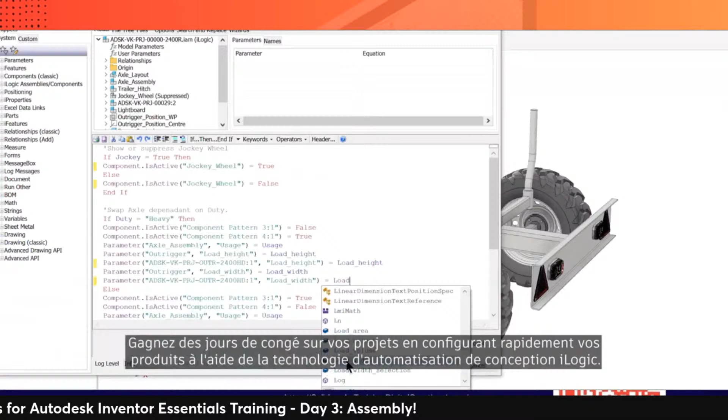Inventor provides you with a stable and responsive environment to help you get your projects to production faster, with a complete set of tools for sheet metal, welded frames, tube and pipe, and electromechanical, and direct access to a robust content library and engineering calculators. Shave days off your projects by rapidly configuring products using iLogic design automation technology.

Speed up design reviews with a cloud-based tool that protects your intellectual property. Connect directly with AutoCAD for your project workflows. And you can extend the power of Inventor with a subscription to the Product Design and Manufacturing Collection to take your designs further with 2D and 3D workflows, cloud-based design and manufacturing, factory planning, and high-end visualization.

Regardless of what you make, industrial machines, conveyor systems, or top fuel dragsters, solve your most interesting problems efficiently and effectively with Autodesk Inventor.

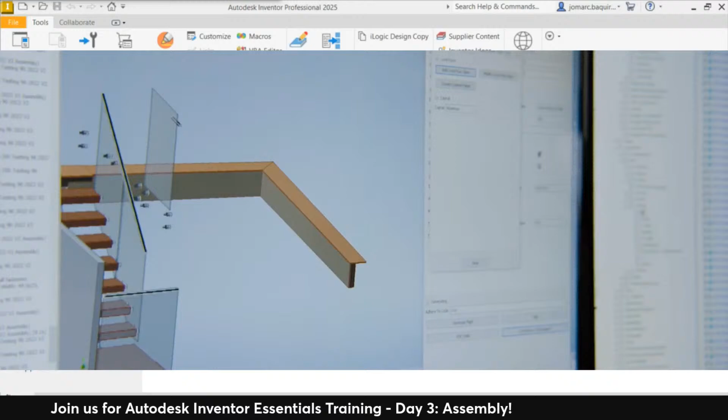So let's say we decided to pull a foot off of that floor, we added a wall there. I would come in and modify the environment, tell it for length, put in either an absolute, or in this case, if they said we'd subtracted 10 inches, I'd do it. And I would just tell it to update all my glass. It's going to automatically engineer it for me. It's going to make it so that it meets all building codes that our product is certified for, and it's going to generate shop drawings and production prints for these as it goes. It's that easy. We're manufacturing 10 systems, 20 systems a day right now.

With Inventor CAM, we take the exact model that is part of our automation that we've used to design for the customer, and it's already toolpathed. So that production engineer is just posting that right to the machine. It's a huge time savings, and it's a quality assurance. As we build in more and more automation, we continue to drive down potential errors that a user can make.

Welcome to Vero. Thank you. Have a seat.

We leverage the Forge Viewer. It enables the customer to view on a web page on their phone exactly what we're engineering and how it will fit into their space.

This looks amazing. We are now over 10 times the size that we were when we started all of the automation. Then in the next 5 years, we're going to grow from $100 million a year in revenue to $500 million. Automation is critical for scaling at the rate that we're going. We would not be able to do the things that we are doing today and looking into the future without the Autodesk tools.

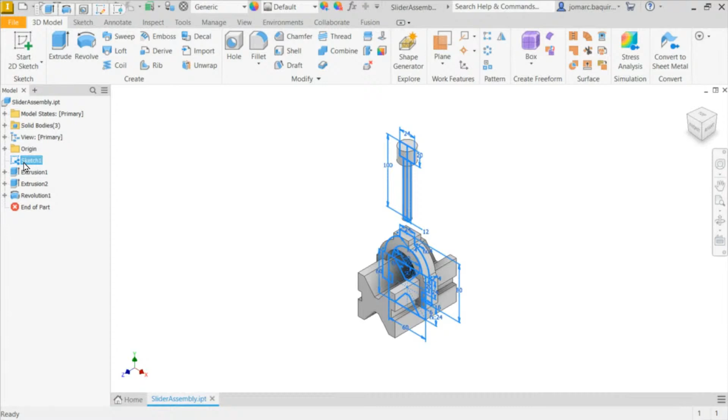Recall on our last session, I instructed you to create this part. So again, this part, this is actually not a part, not assembly. Technically not an assembly, technically it's a part. A part that has 3 solid bodies, and it all came from a single sketch.

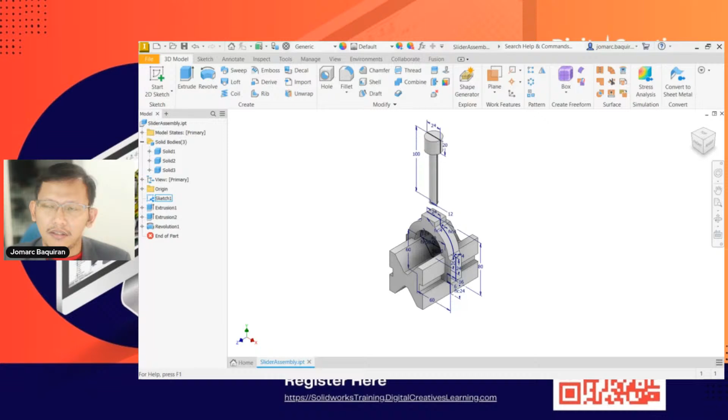So again, guys, requesting you to screen capture this activity and hoping you have completed the course that we shared about mastering part modeling.

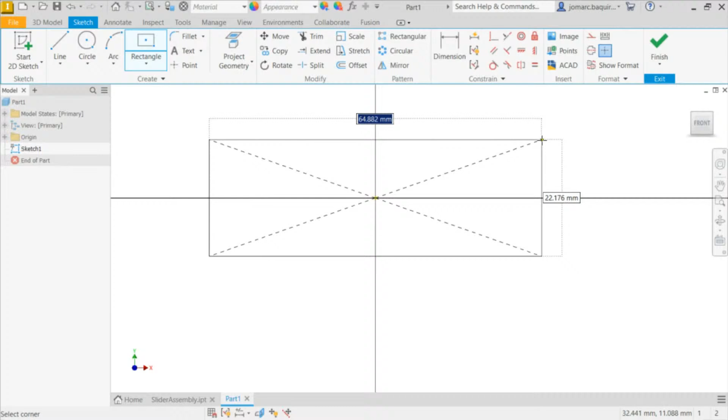Selecting XY, and because it's a rectangle, head over to rectangle, specifically 2-point center rectangle. As always, the target is having our coordinates at 0 be at the geometric center. So for the geometric center of this rectangle, it should look like this.

We haven't applied any constraints yet, that's why I can left click and hold and resize this entity, or this rectangle.

Next, let's add dimensions. The shortcut for dimension is letter D. Let's define this, selecting this horizontal line, value is 120. This vertical to be 40.

Okay, I want you to follow along. Quickly create this rectangle having a length and width of 120 and 40.

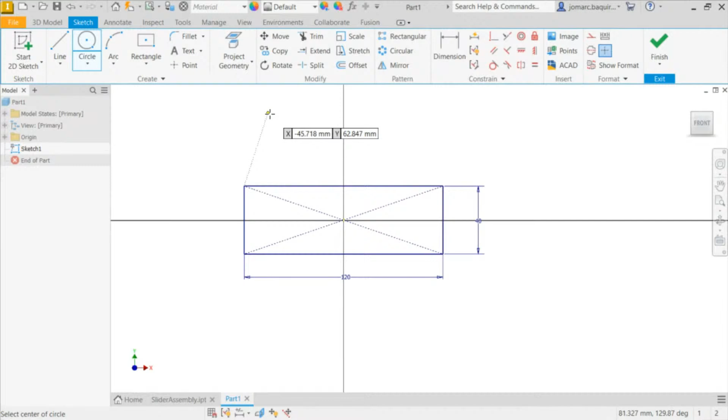Okay, and next, there's two holes or circles. Instead of creating it here, I prefer creating the circle somewhere around here. I can bring this over, but I prefer doing things on a clean slate.

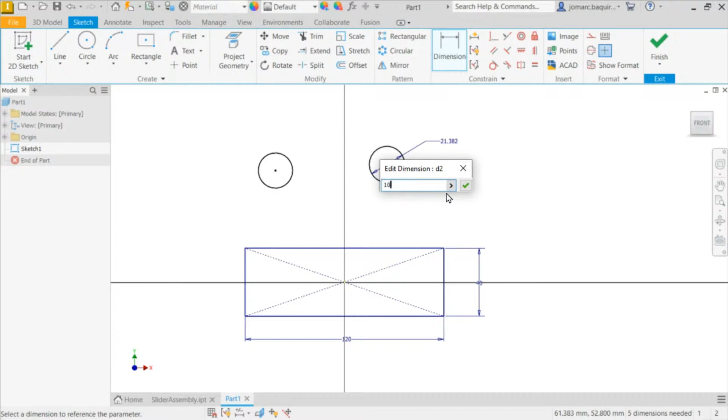So two circles, hitting D, diameter of these two holes or circles to be 10. Keying in 10, hitting enter. And obviously these two circles should have the same diameter.

With that in mind, we're going to head up to constraints and simply apply an equal constraint. Selecting equal, I want this circle with the dimension to be the same as this circle which has a dimension. So notice the equal constraint symbol visible on these two circles.

Moving this, I cannot resize this anymore because it is equal to the circle on the right side. Okay, I want you to follow along, let's create this one, very simple.

Next, the distance between, or the pitch of these two holes, is actually 80. For me, I prefer creating a line from this center point going to this center point. Let me zoom in.

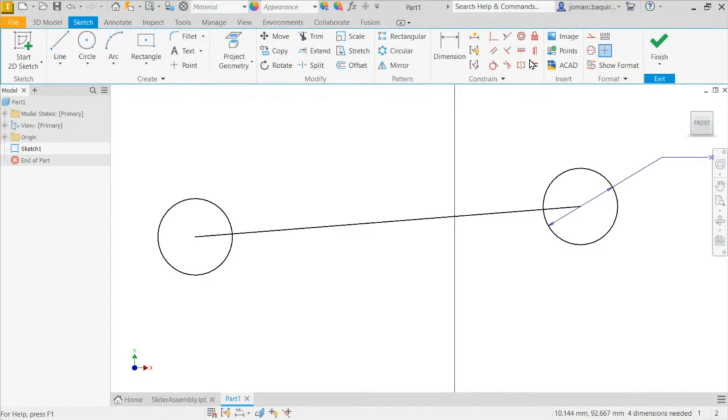So I connected these two circles with a line, and now the horizontal constraint was applied. If it's not, like for this instance, I have deleted that constraint again, I'm going to head up, selecting horizontal, and selecting this line to be perfectly horizontal.

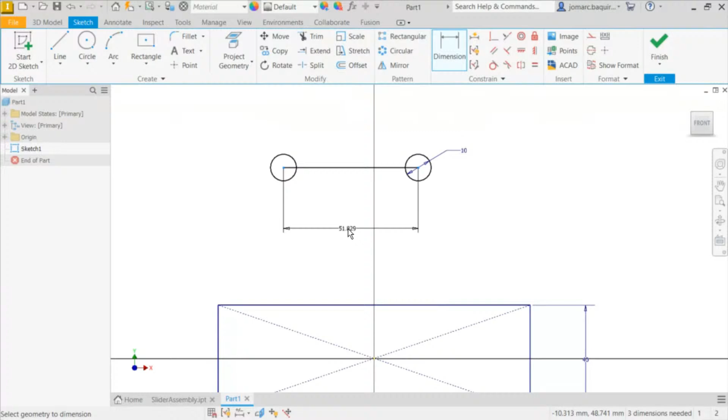Next, I'm going to add that dimension. Instead of selecting this line, the dimension is actually indicating that the 80 is the distance of this center point and this center point. Yes, it may be the same, but I'm suggesting to you to dimension things in their exact design intent, because what really is being defined by 80 is these two center points. So keying in 80.

Next, notice here on our rectangle it created construction lines, these two diagonal lines. I'm going to convert this horizontal line as well into a construction line. With this line selected, left click, I'm going to right click and select construction. Or on our ribbon, you can select center line from the format. Again, right click, selecting construction.

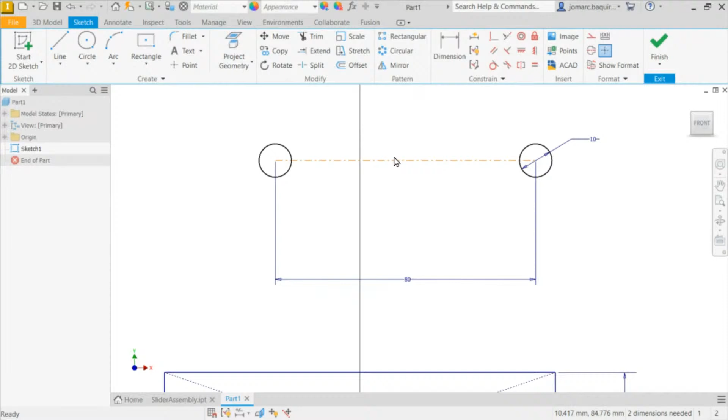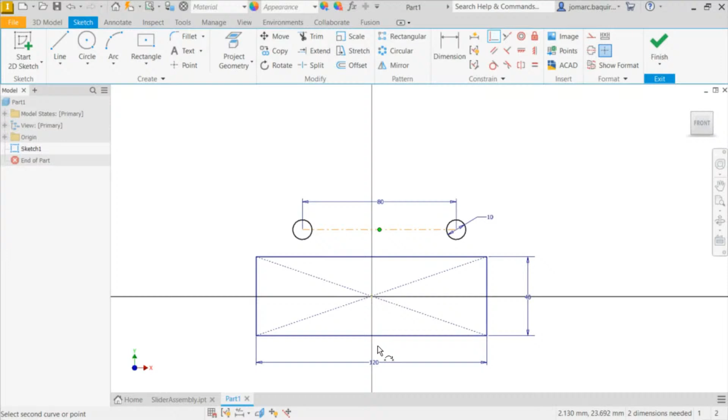Next, I want this to be perfectly at the center, into our geometric center. To do that, I'm going to select our coincident constraint up above. Searching for the midpoint, hovering over here, notice that green dot, it indicates it's the midpoint. Selecting this midpoint and selecting our origin. This red dot, if you go to our model tree, is actually this center point. So selecting that center point.

I'm trying to move these entities just to check, and obviously it changed into a dark blue color, which means it's fully defined or fully constrained. So from that, we're now allowed to do extrusion.

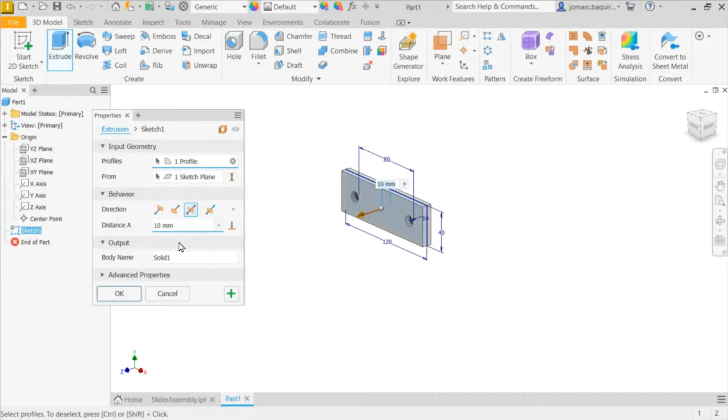Selecting finish, selecting extrude, and selecting this profile. Again, the goal is always to have the XYZ 0,0,0 at the middle or center. So for the behavior, I'm going to change this into symmetric, and again for the thickness, it's 15. Hit OK. Let me select this edge.

If you really want to check, I hit M to select Measure, selecting this edge. It really is 15, just to confirm. 15.

So we're done with this part, but to be organized, let's rename this with Control S. I'm going to paste to the project folder, the location where I'm working. Hitting enter, this is named as plate. So naming this as plate, hitting enter.

So again, showing you our activity this afternoon. For those who are late comers, you may screen capture this. We're currently done creating the plate.

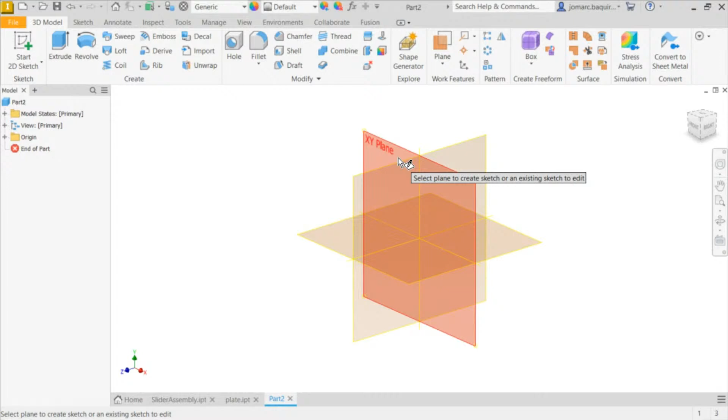So again, we're prompted to select the plane to sketch on. I prefer the XY plane. I am in the line command. Notice here, a line is being activated.

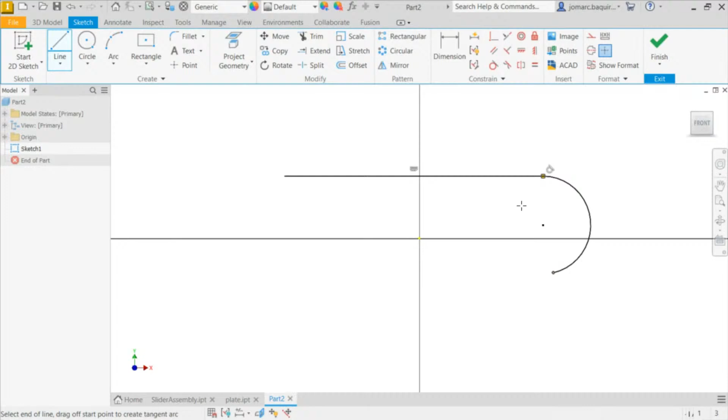As an exercise, I want you to left click, then left click once more but still holding the left mouse button. So left click and hold, release, left click and hold. That means if you hold the left mouse button, you create an arc. So release, left click and hold, connect it to the other, and release. Giving you a few seconds, I want you to be familiarized with holding that left mouse button in order to create a simple slot.

Left click and hold, release, left click and hold, release. So left click and hold to quickly create an arc. Going back, I have created the cross link.

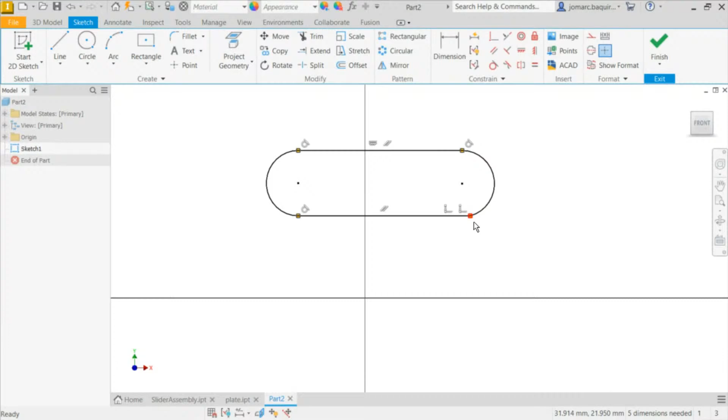Let's now put dimensions. I'm going to hit F8 to reveal the constraints that currently exist. Notice here on the lower right, we need a tangent to make this a smooth transition. Selecting tangent, selecting this arc and this line.

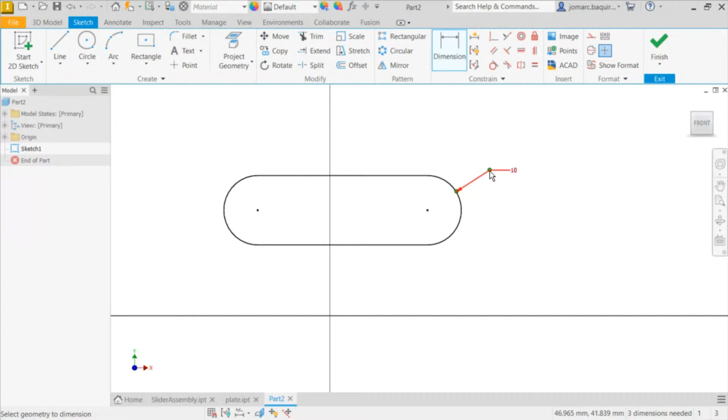Resizing this again, hitting D. The radius for this arc to be 10. And it has two circles.

Control Shift C, the shortcut for a circle. So creating two circles, or another one just for demonstration purpose. I'm going to create the circle here. Next, defining the diameter of the circles, so it's 10. And selecting the equal constraint to have this circle and this circle equal in diameter.

Instead of using the coincident constraint to have these center points aligned with each other, I prefer showing you concentric. Concentric causes two arcs or circles to have the same center point. It's actually the same as coincident, but only for arcs, circles, and ellipses.

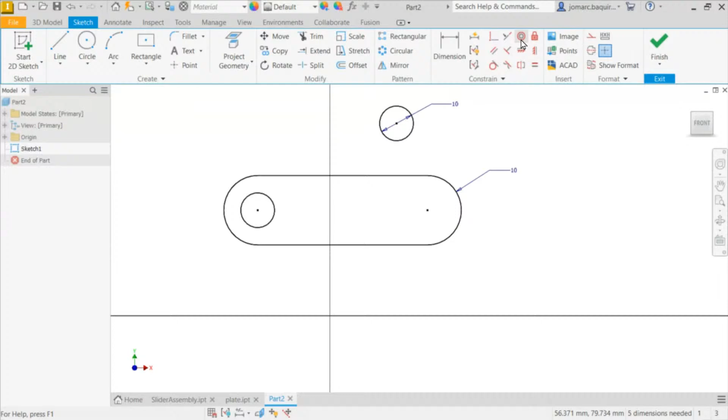So selecting this circle and this arc. Let's define the distance or dimension there, which is 80. D. Selecting these two center points, 80.

Okay, and next, of course, I want our geometry with respect to having our XYZ, or the center point, be at the center. So let's now position this accurately.

Instead of creating a diagonal line and then turning it into a construction line, let's utilize our constraints. I'm going to select our vertical constraint, looking for that midpoint. It's here. Selecting that midpoint and going over to our model tree on the left, selecting the center point. Notice it nudged to the left, which means the midpoint and the center point are now aligned vertically.

Next, applying the same procedure but now horizontal, selecting this center point and our center point. Moving this dimension, placing that over here.

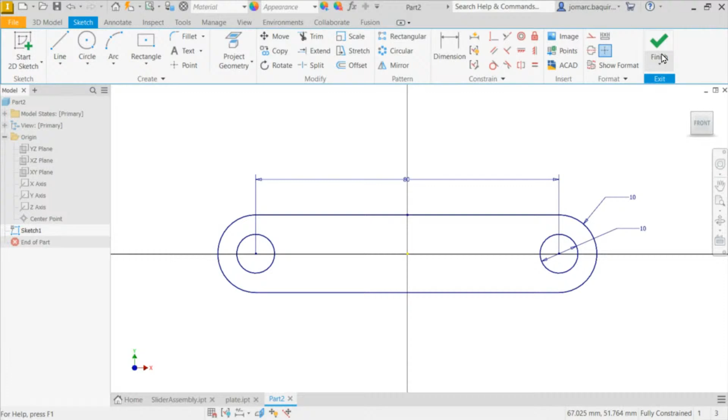So we now have a fully defined sketch, and if this is all in dark blue, we can now hit Finish Sketch, or simply select E for Extrude. So prompted to select profiles, it's a single profile. The behavior to be symmetric, thickness to be 10, and I'm going to select OK.

And double click the mouse wheel for zoom extents. So we're done with the cross link, hitting Control S, naming this as cross link, hitting enter or save.

Okay, so yep. Giving you a few seconds to create that cross-link. And showing you again our activity for today.

So next, hit Control N. Let's now create the link L and link R. Hit Control N or up to the right for new part. Again, it's metric standard millimeter.ipt. I'm going to hit Control S to quickly save this file, naming it simply link.

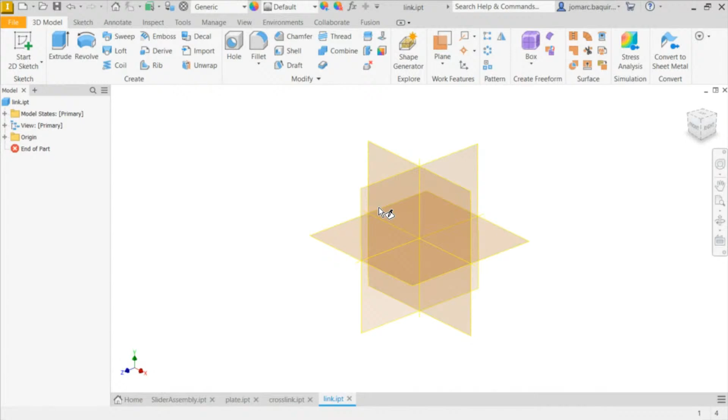So hitting S for sketch, let's sketch on the XY plane. Hit L for line, and let's recreate that technique utilizing an arc while in the line command. Left click here, left click and hold, release, left click and hold, going to this endpoint and release.

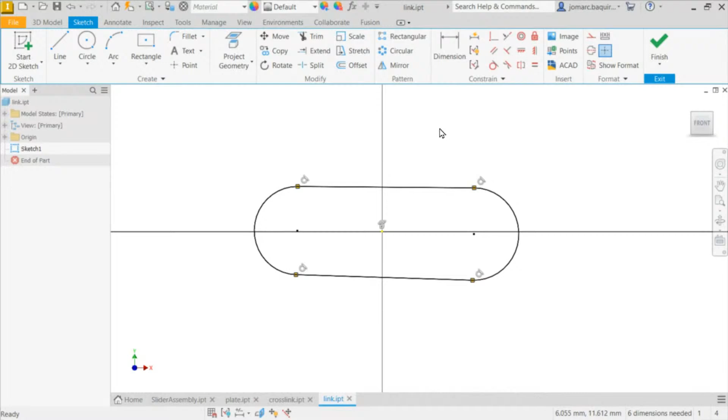F8. Notice I have two concentric constraints, selecting tangent, selecting this line and this arc, this line and this arc. Next, this obviously needs to be horizontal, so selecting horizontal constraint.

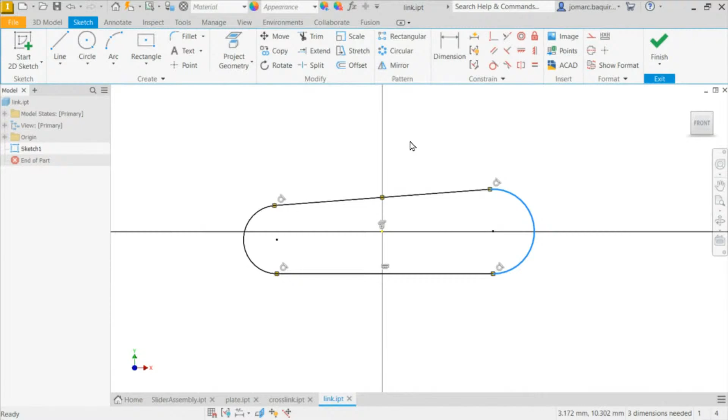Let's apply the same technique: selecting vertical, searching for the midpoint of this line, aligning it with our center point, selecting horizontal, selecting the center point of that arc and the center point. Let's check. By moving entities, you can find out what needs to be applied. So this one obviously needs to be horizontal.

Okay, so next, Control-Shift-C for a circle, creating a circle from that arc's center point. Diameter for this is 10 as well. So creating two circles, keying in 10, making these two circles equal.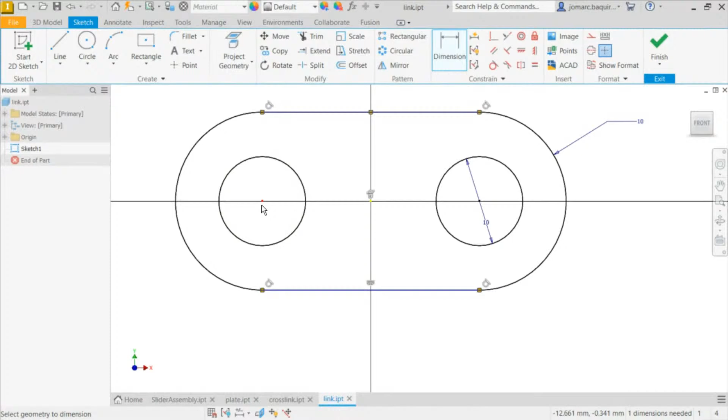Hit D again, defining the radius of this arc to be 10. Hit D again for dimension, selecting the center point and the center point. Distance between them to be 30. All in dark blue. So we can now hit E for extrude.

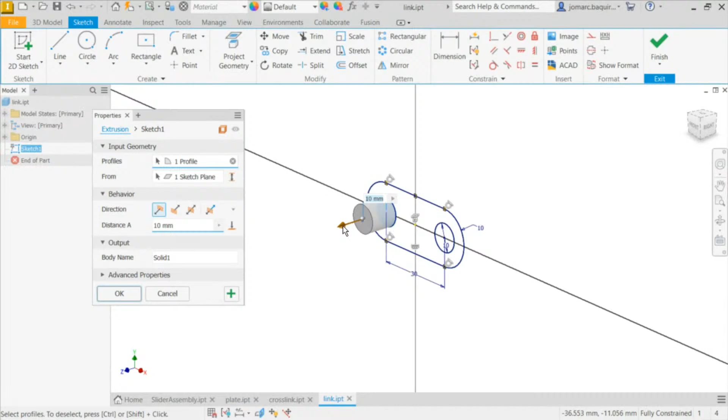For now, I prefer selecting this profile on the left, selecting that arrow, moving it to the right. As you can see, it's actually 15. But of course, I'm coming all the way from the center and this plate's thickness is to be 5. So if that is 15, there's still an additional plus 2.5, right? Because I'm coming all the way from the center.

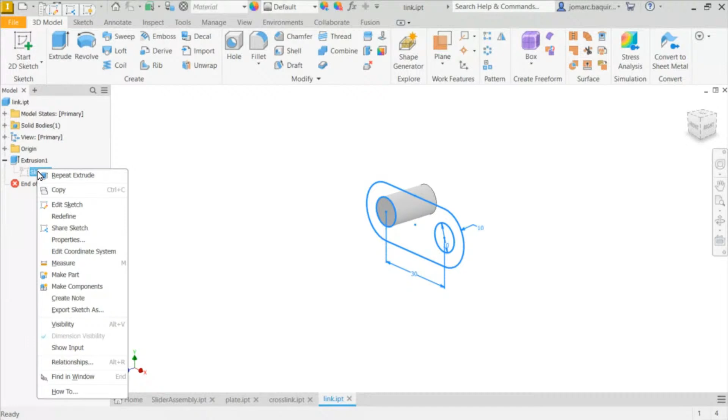And we haven't created that plate yet. So 15 plus 2.5 - I'm showing you we can create a mathematical operation inside the dialog box. So hitting enter. Of course, the sketch was consumed by extrusion 1, so all we have to do is twirl this down or expand this.

Select that sketch, right click and enable its visibility. Alt V. Okay, so hit E again for extrude. Selecting this profile, pulling this arrow to the left. So directly keying in 12.5. Hit enter.

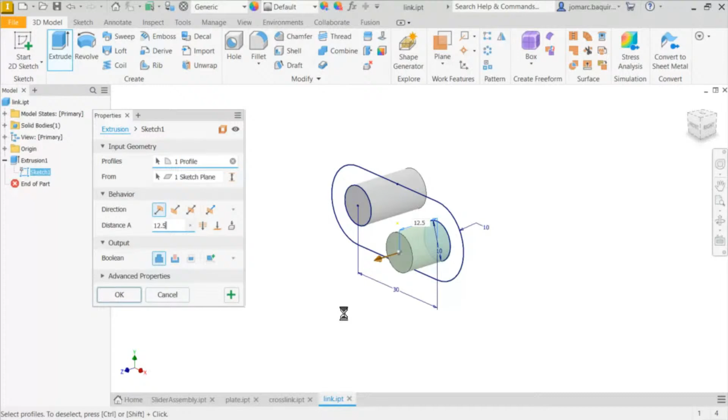Finally, hit E for extrude again, selecting symmetric, and once more the thickness for this to be 5. But notice we have a whole recess here.

So with that, I have selected one profile. I'm holding Control to add that profile. So rotating as well, holding Control, selecting this profile as well. So I have selected 3 profiles.

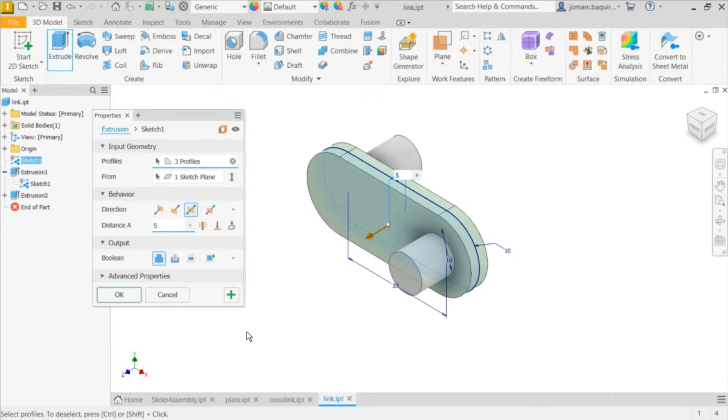Okay, and of course, turning off the visibility of sketch 1. So right click, turning off its visibility. Control S to save this file.

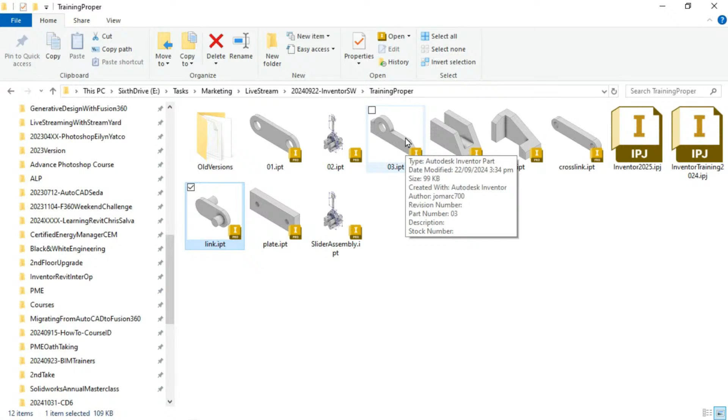Okay, so again, I'm showing you my project folder. So we have created the link, the plate, cross-link, and link - these 3 are all complete. So the next thing we're going to create, of course, again, recall all of this 3 has a file name extension of .ipt.

And for assembly, the file name extension for that - I'm going to hit Control N. As you can see here, the file name extension for an assembly in Inventor is .iam. So let's select standard millimeter .iam. Double left click.

Okay, so from here, we now have it currently named as assembly 1, if you can see the tab at the bottom. So we're going to bring in, of course, the parent component - that parent component or parent part is actually the plate. So let me show you one of the methods in bringing in components or parts into an assembly. I have here my project folder.

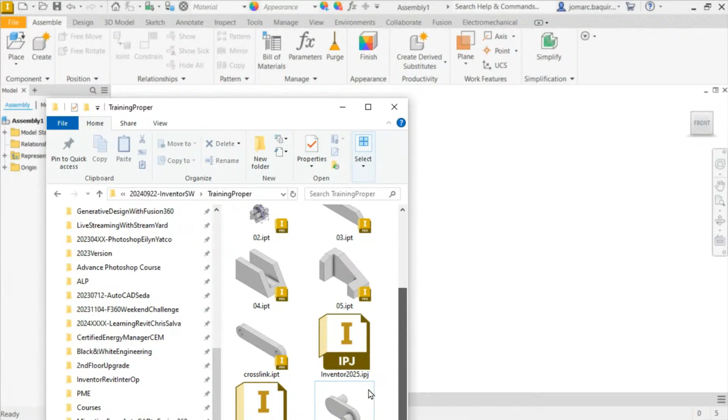Searching for that plate. So here is the plate, and in the background is our Inventor software. I'm going to left click and hold, drag and drop onto this blank canvas, release, removing my project folder. As I release, it quickly brought our plate into this assembly file.

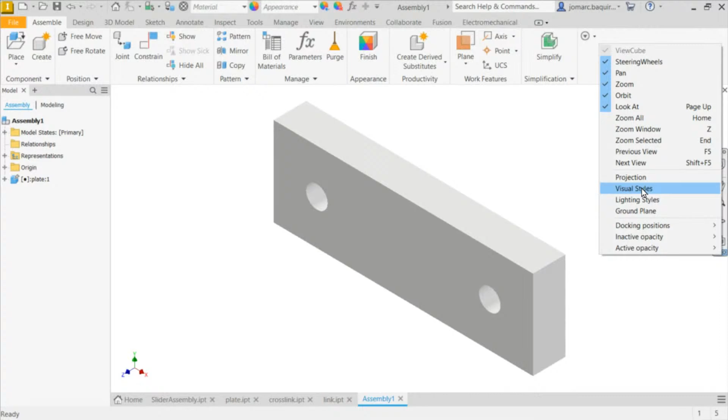So I prefer seeing the edges, just a personal preference. I'm going to tick this, select visual styles, and I prefer seeing shaded with edges. Just a personal preference, I prefer seeing that edge.

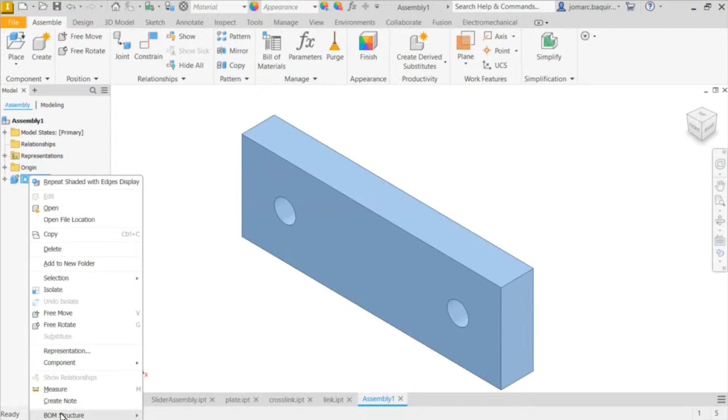Doing that method by dragging and dropping again, it brought in the part which is the plate, and it also made the part fully constrained. I know that because I cannot move this anymore - this is actually fully constrained. An indication of that as well is having this pin. To remove that pin, it's actually simply ungrounding this. Okay, so that's the first method.

So the next one is under assemble, let's bring in the link. Under place, I'm selecting place, pasting into where our project folder is, and I'm going to select link. Double left click on link. So here it is, left click - that brought in the first copy. I can also left click again to bring the second copy. Hitting escape.

So next, there are actually two ways of joining or doing the assembly for these parts - we have joints and constraints. Constraints are more useful when it is all about the drawing, and joints when you're simulating dynamic movements of the assembly. For now, let's discover constraints. Joints was later added to Inventor a few years ago, but initially the way of doing an assembly in Inventor is using constraints. So I'm going to select constraint.

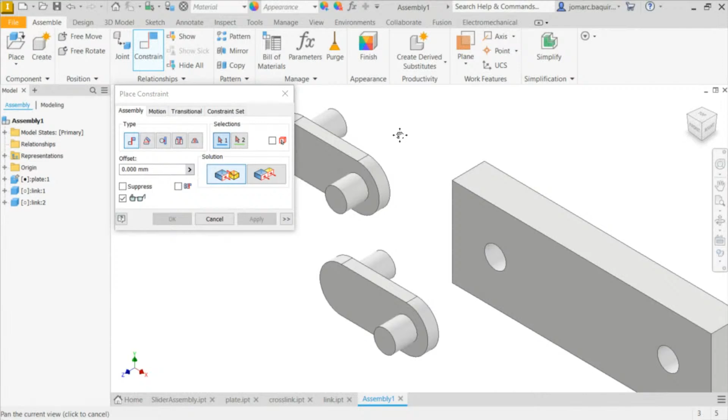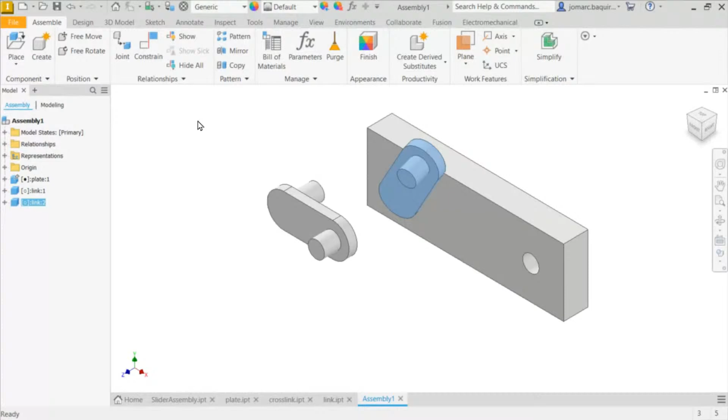So next, I'm going to select the dot. Okay, and definitely it should be piercing in, right, to that dot as well, to that side. Let's check, selecting apply. Notice I have the wrong relation, so I can always edit that or simply delete. This will be a few practices for you to be familiarized with.

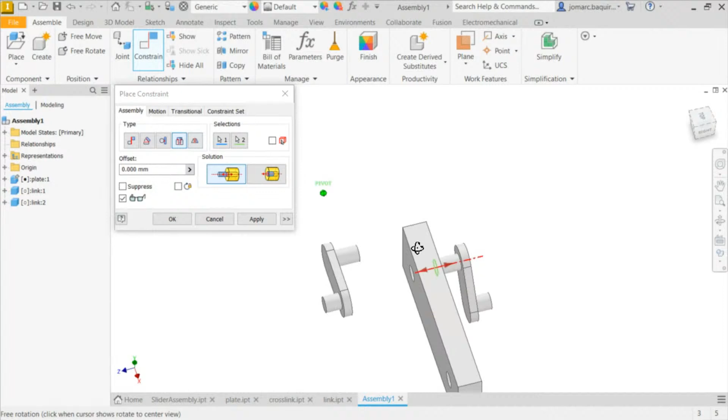So instead of that dot, notice I'm going to select this type of selection - it has a red circle and an arrow. Same on this side, hitting F6. We're seeing and selecting the solution, alternating between solutions. Selecting OK.

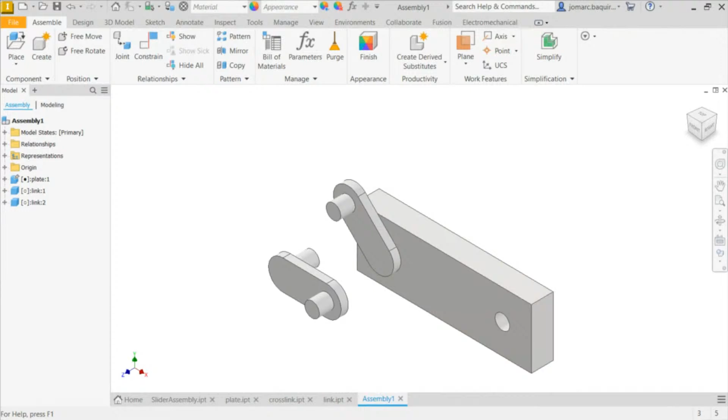So moving this, same again. Let's bring in our crosslink, heading over to place, selecting crosslink, wrapping this here.

Selecting constraint, okay, so selecting the type to be insert. Select - notice that direction, that red circle on the edge. Left click on that, and same here, left click on that. Selecting the solution to be aligned. Selecting apply.

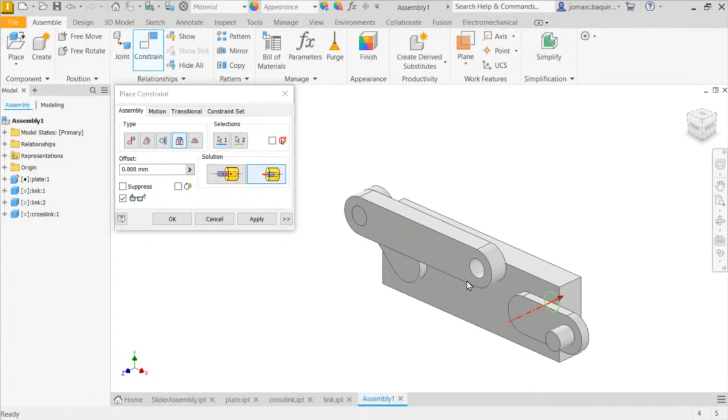So definitely this one, same procedure. Left click on that, notice that selection. So same with this as well. Applying apply, and lastly, selecting this edge and this edge. Selecting OK.

So yep, congratulations, that's our first assembly using constraints. And now, of course, hitting Control S, let's name this as rotator-assembly. Hitting Enter. So if I go over to my local folder, it's now here, rotator-assembly.iam.

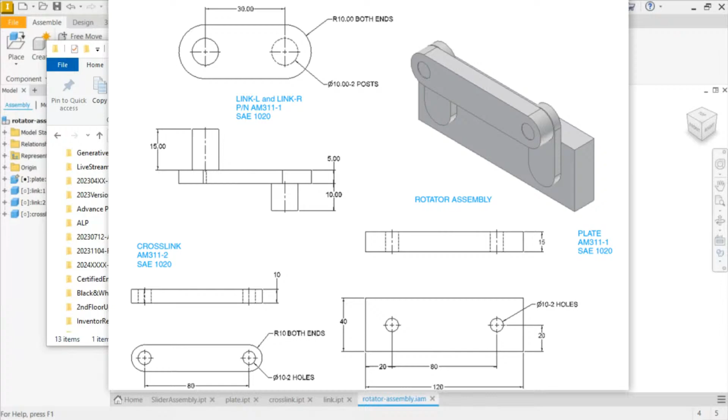So again, showing you our drawing to challenge you - we want you to follow along. Okay, so hiding this again, showing you our end result using assembly constraints. Okay, so again, giving you a few minutes to catch up.

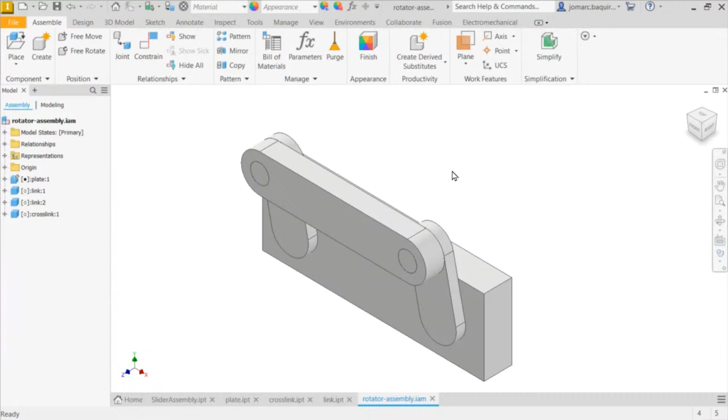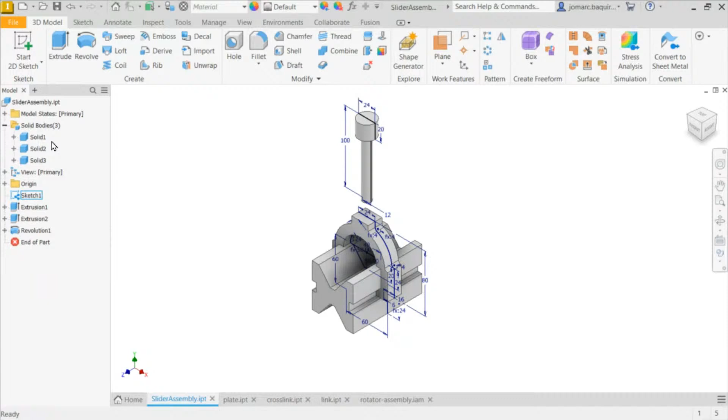Okay, so next, let's now discover the second way. There are ways - again, I'm just showing you the two ways, hoping this is enough for you to inspire you to go on and have that initiative to learn it and master it all on your own. So again, here we are back to the part - it's just an IPT having three bodies. So we're going to turn this into an assembly. Again, it all originated from a simple sketch, right? It all originated from a simple sketch.

This sketch, for those into architecture, may be a layout for doors and walls. For product or machine designers, this is a layout for this assembly. The concept is still the same: we initially have the layout, then we extrude things. But for Inventor, it's in a single part, and that single part actually has three extruded bodies.

So let me turn on the visibility again of these three bodies, and turn off the visibility of that sketch.

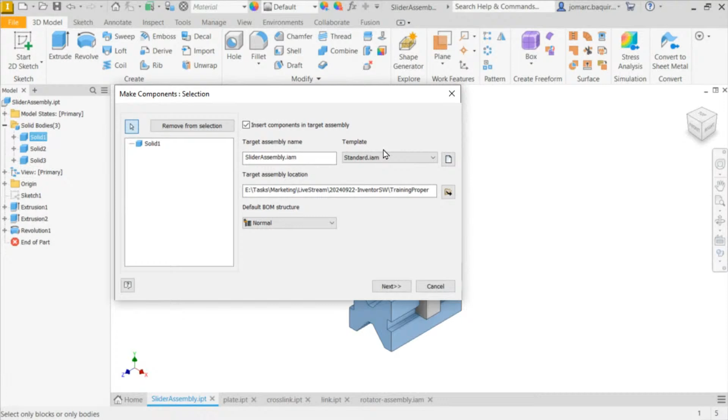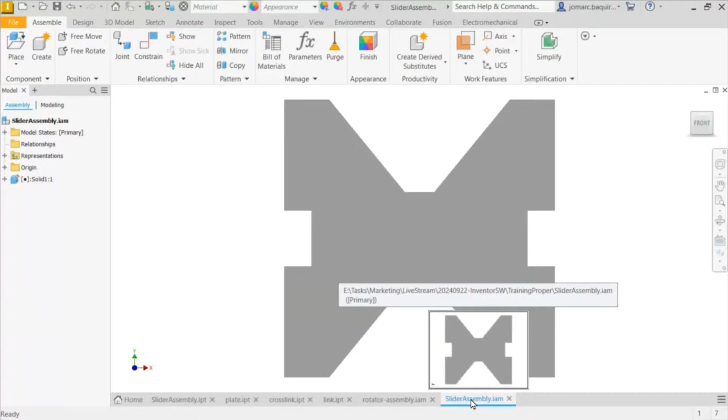Next, I'm going to select solid one, right click, and make components. Hovering over solid one, right click, selecting make components. I'll leave the defaults: SliderAssembly.iam for the target assembly name, standard.iam as the template, location still on my preferred project folder. Selecting next, and selecting OK, leaving the defaults. Notice at the bottom, another file was created — it's now a SliderAssembly.iam assembly.

Hitting F6 for isometric view. I prefer going to the right side, shaded with edges. So it's the same. This block is placed and is now grounded, and of course it cannot be moved.

Next, we'll be bringing in the next component. Heading back to slider assembly, let me close this to have a better view. This was already saved — Control F4, Control F4, Control F4, Control F4. Okay, so a part and an assembly.

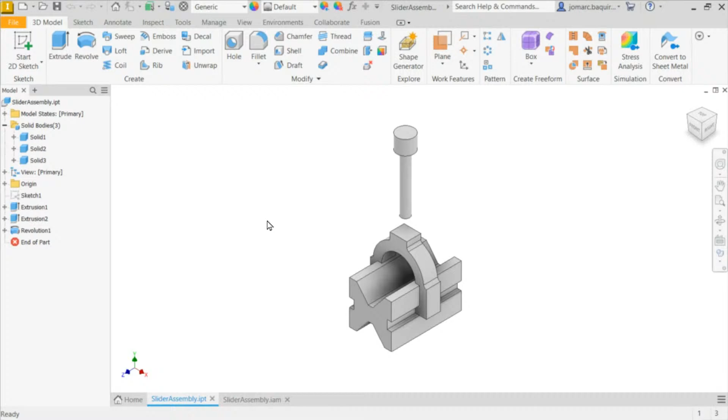So I left something out — this part should actually have a hole for this shaft to penetrate into, right? So under this part, let's go to Modify, select Move Bodies, and that body would be this peg or the shaft. I would like to move this offset Y at -50. Notice that green, it's a preview. I'm going to select OK. So now we have an interference, an overlap.

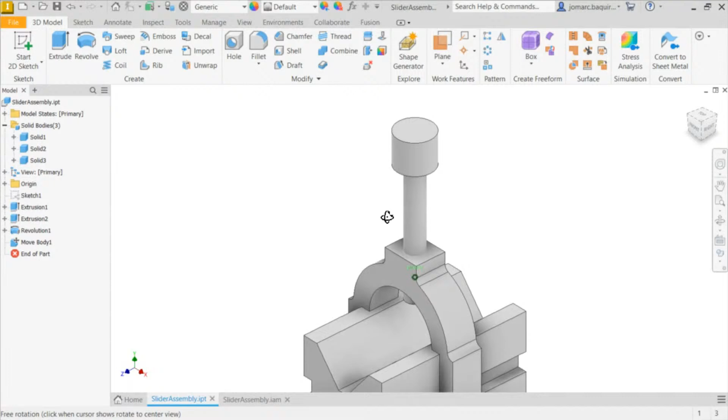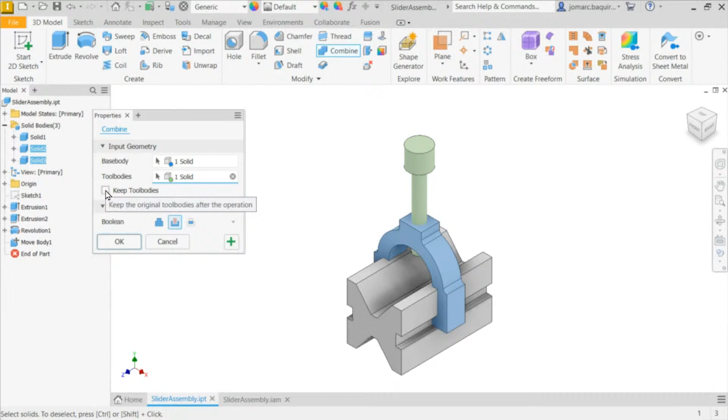Definitely if we do an assembly, since there's no hole here, this shaft would not go in. So what we're going to do next is head up again to Modify, select Combine. For the base body, I'm going to select this part; for the tool body, I'm going to select this shaft. I would like to have a Boolean cut operation, so selecting cut. And I want to retain this body as well, so I'm going to tick or enable keep tool bodies. Selecting OK.

The tool bodies visibility was turned off, so we now have the hole. We made a Boolean subtraction operation — we subtracted solid 3 to remove the material here, creating the hole for this part. So right click on solid 3, enabling its visibility.

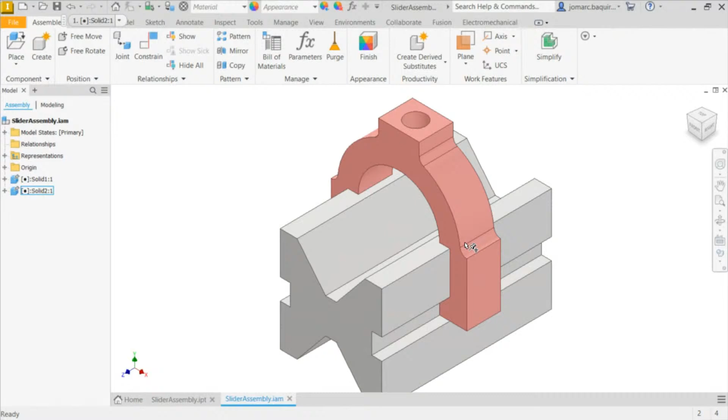Control S. From here, we can now head back to how we created the components. I'm going to select solid 2, right click, make components. The target assembly is of course here at the bottom — it's slider assembly. Selecting next, selecting OK. Notice it brought in the solid 2 body as well. Let's get back to slider assembly.

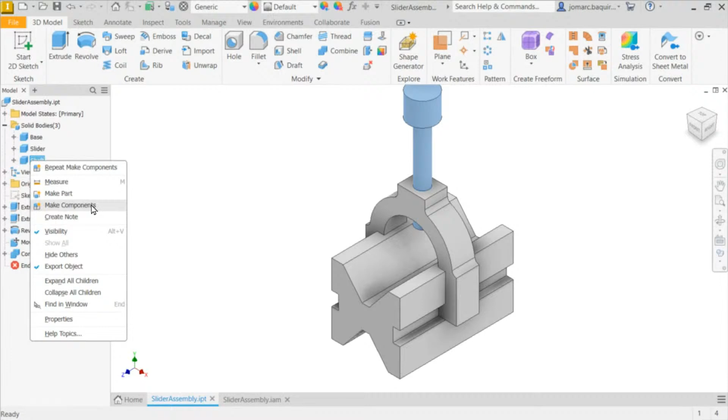How about renaming solid 3 into shaft? Let's try to rename this — let me rename this as shaft, let me rename this as slider. Let's check the effect if it will copy the name. How about this as the base? So shaft, rename to shaft, this body. Right click, make components — again, target assembly is this assembly that we currently have. Next, selecting OK. And here it goes again. So here it is, selecting this.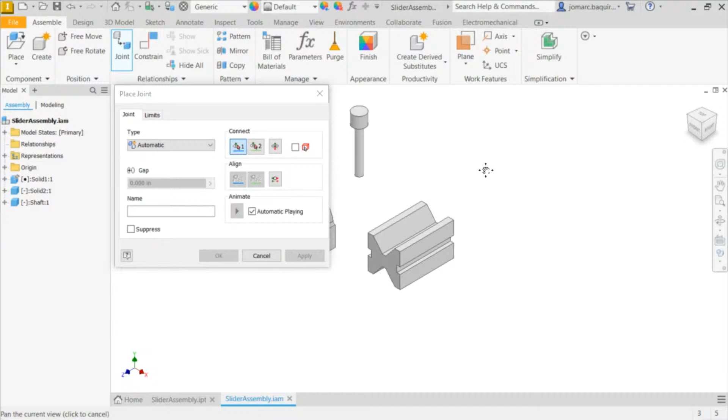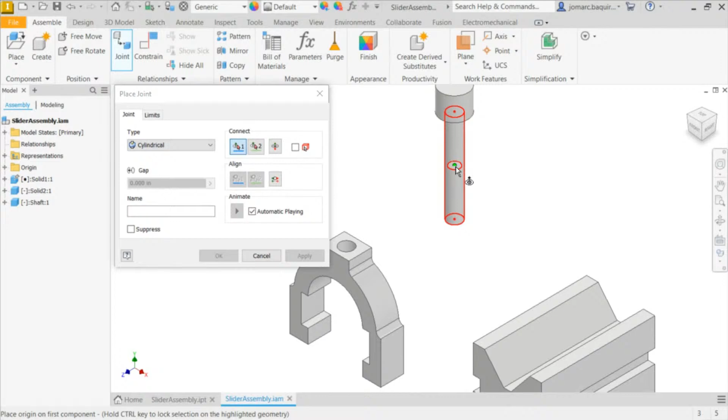Two parts, and I'm going to unground this because this should be moving, right? So moving this here, placing this here. This time we're going to utilize the joints, so I'm selecting Joint. Next, I prefer the type because my intent is to have this shaft be inserted into this part — that would actually be a cylindrical joint. Hovering over any of this, I prefer selecting this joint. Left click here, I want that to go over here. We have an automatic preview playing. Selecting OK — so this is currently the effect of that cylindrical joint.

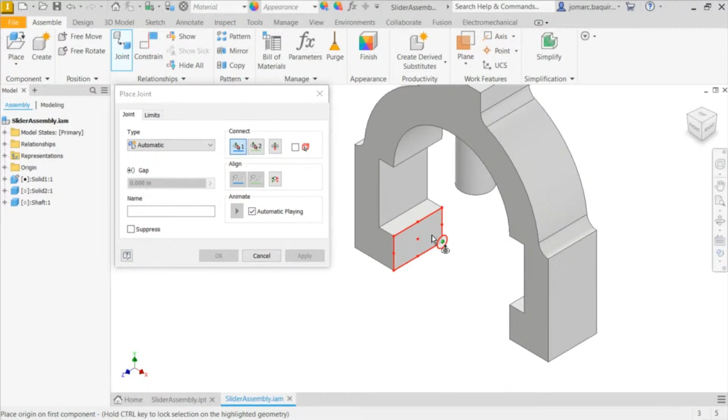And of course for this one, it would be sliding in this direction, so the next joint should be a slider joint. Selecting Joint, let me select this initially and this initially. Checking — notice it's the wrong orientation, right? So again, this needs a series of practices for you to become familiar with the equivalence of selecting the joint constraints. Let's select this edge — notice again, that's the wrong way.

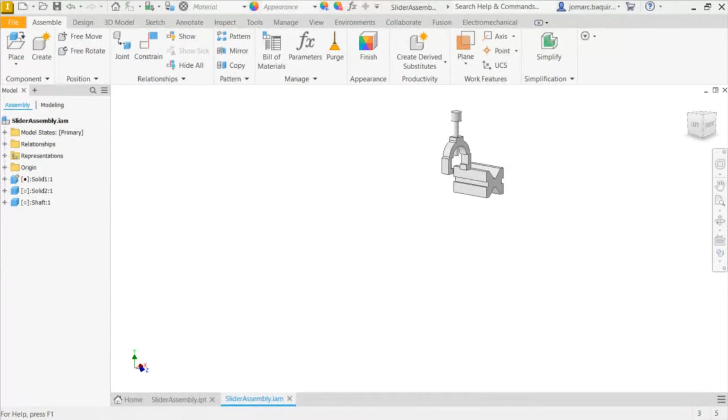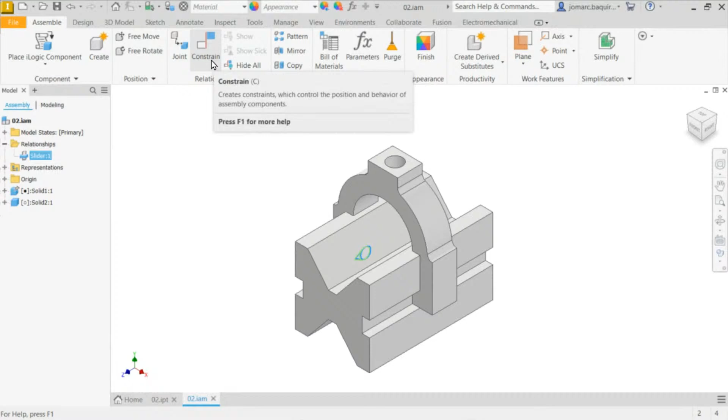So going back, again showing you how the joint was applied. Under relationships, we can always see the effect. Whenever we do joints or constraints, it creates a folder. So here for the joint, it created a relationships folder. Notice if I hit edit, we can see what the selection is.

Again, I want you to put in the work to be familiarized. Of course, practice is the key.

Okay, going back, ungrounded, selecting J for joint, cylindrical, selecting this joint and this joint origin, and hit OK.

So, yep, congratulations, hoping you have followed along. And this now ends our part sketch, part and assembly essentials training for Autodesk Inventor.

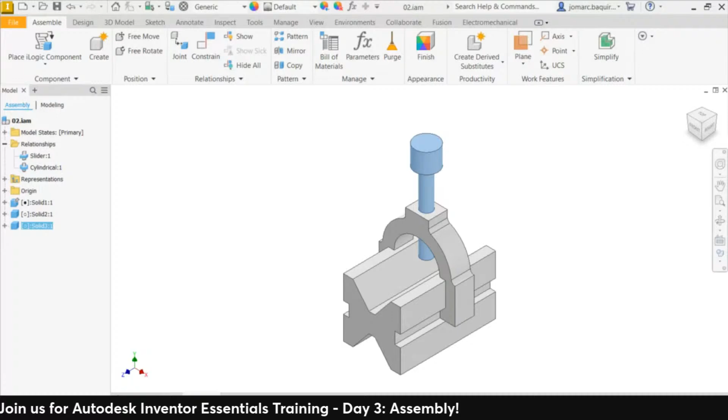These cars are so violent. It's amazing how much damage we can do in 3.5 seconds. You're going to win or lose by merely inches, thousandths, 10,000ths of a second. Everything has to be built right. Everybody has to be on their game. Hopefully you're on the other side of that, and you get the W.

Kalitta Motorsports is a professional drag racing team. We compete at 24 events across the country. We use the product design and manufacturing collection from Autodesk. It makes our job so much easier. Not having to use multiple software packages saves us a ton of time. So Inventor is helpful because it's tied in with everything. You do all your modeling, you do your drawings. When you update in the model, it updates the CAM.

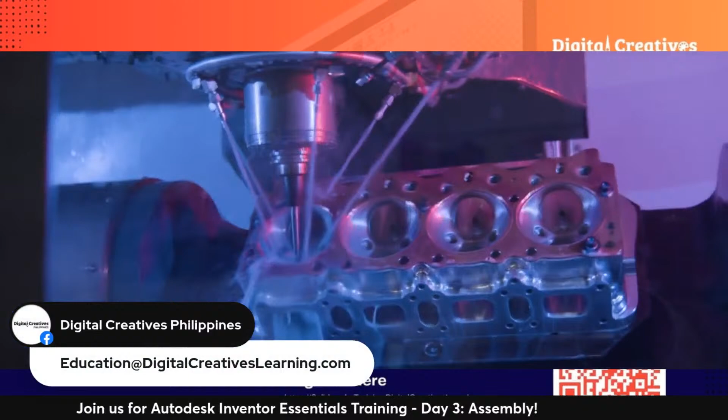So these cars go over 330 miles an hour, and they travel 1,000 feet in less than 3.5 seconds. To accomplish something like that is really tough on the parts. This is not a business where you can make a ton of mistakes. If we don't do our job down to the smallest detail, that driver's life is in our hands. Everything has to be built right. Everybody has to be on their game.

Welcome to Charlotte's Z-Max Dragway for the 4-Wide Nationals. Safety is number one, and then second would be performance. We need to make sure our equipment's strong enough and light enough where we can outperform our opponents. Currently, they're finishing up the track prep. We've got Top Fuel Dragsters up next for you.

At the 4-Wide Nationals, we had the Autodesk car on Doug Kalitta's Top Fuel Dragster. My expectation is to win every race we go to. In lane 2, we have Doug Kalitta with the Autodesk car. So Inventor is helpful because races in our league can be decided by thousandths of a second. So if we find something on a part to make it a little bit stronger, a little bit lighter, or a little bit better than what everybody else has, that makes us a big part of winning races.

For Kalitta, crossing the finish line first, clocking in over 330 miles per hour. Seeing something get made and then get put on the race car, and us going out and running over 300 miles an hour, that's pretty neat to see.